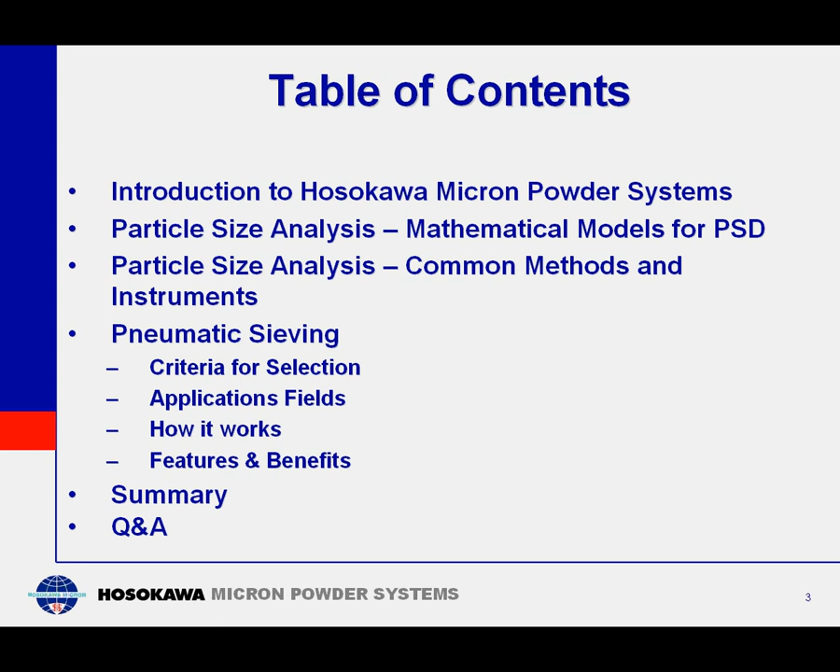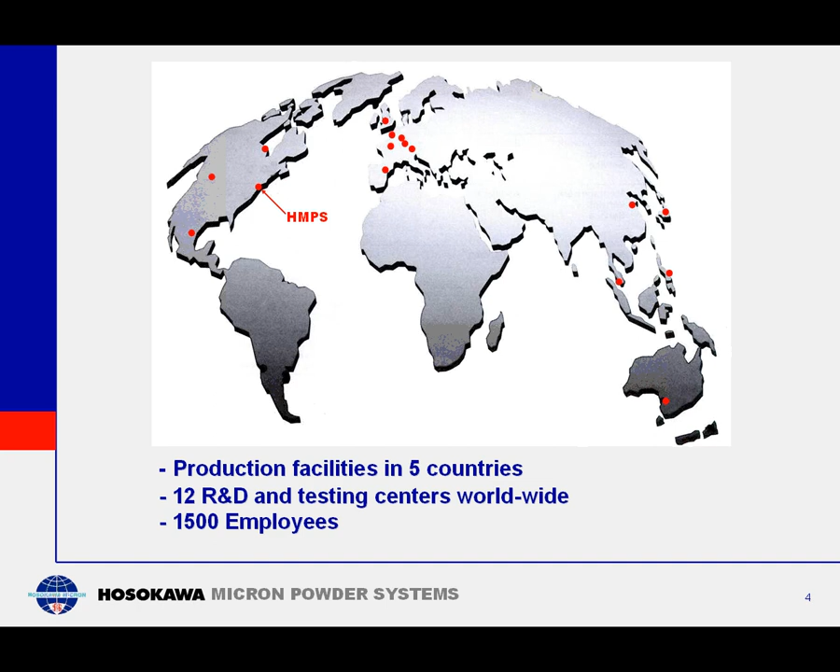Hosokawa Micron Powder Systems is a division of the Hosokawa Micron Group, headquartered in Osaka, Japan. We are the global leader in powder processing equipment manufacturing, employing over 1,500 employees worldwide, with production facilities in 5 countries and 12 research facilities and state-of-the-art technical centers. Hosokawa Micron Powder Systems is the North American division of the Hosokawa Micron Group, supplying products and services in the chemicals, minerals, food, and pharmaceutical markets.

Our brand names include Mikro, Alpine, Micron, Vrieco-Nauta, Majac, Stott, and Vitalair. Our division was founded in 1923 under the name Pulverizing Machinery. We are located in Summit, New Jersey, with approximately 50 employees, and have been part of the Hosokawa Micron Group for approximately 23 years.

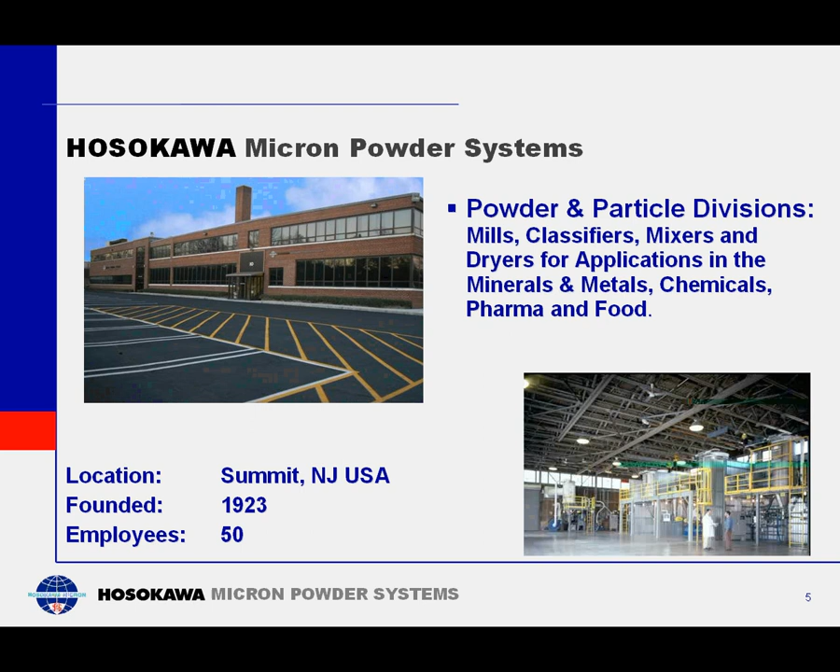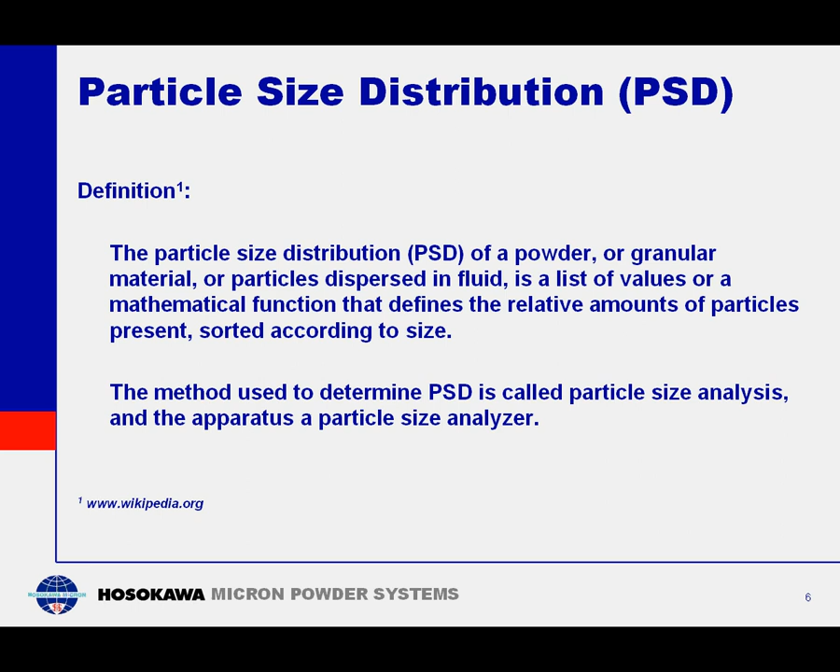Before we review the models and common methods for particle size analysis, it is essential that we first define the term particle size distribution. Particle size distribution of a powder, granular material, or particles dispersed in a fluid is a list of values or mathematical function that defines the relative amounts of particles present, sorted according to size. The method we use to determine particle size distribution is called particle size analysis.

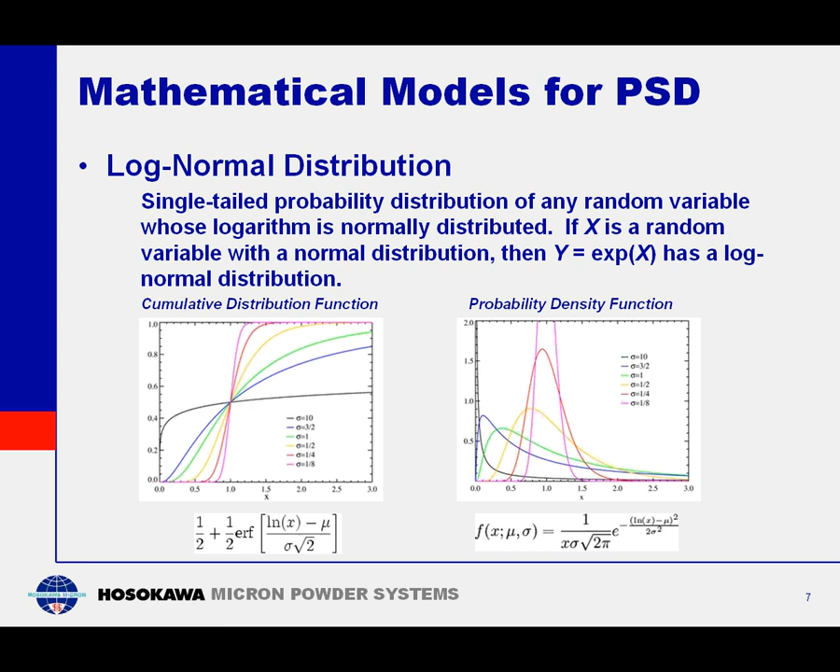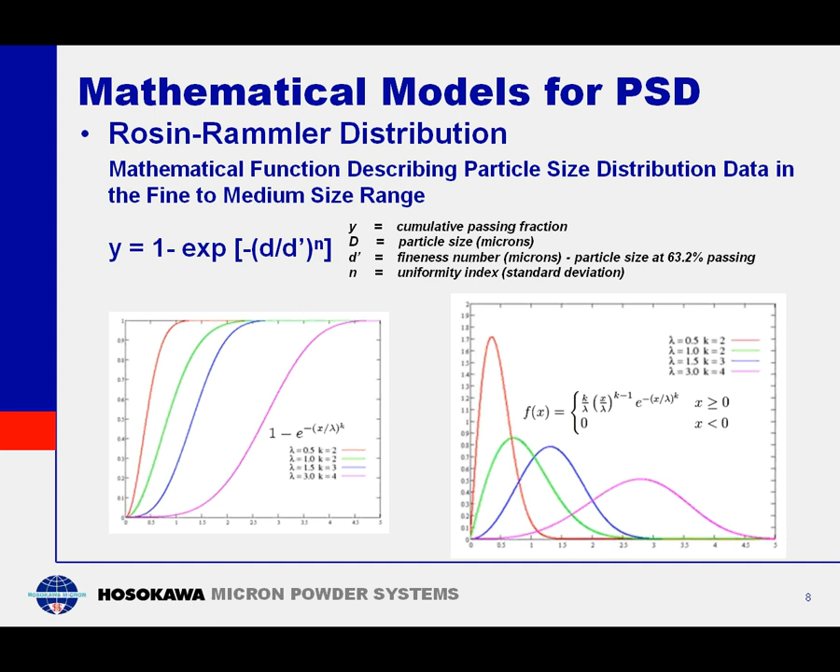Before we review the methods for particle size analysis, one must first ask: how do I select the right type of analyzer? Here are common criteria for selection. They include: what is the particle size range of the powder or of your sample? What are the characteristics of the powder—for example, is it soluble in water or alcohol? Is it cohesive? Is it friable? How poorly or well does it flow?

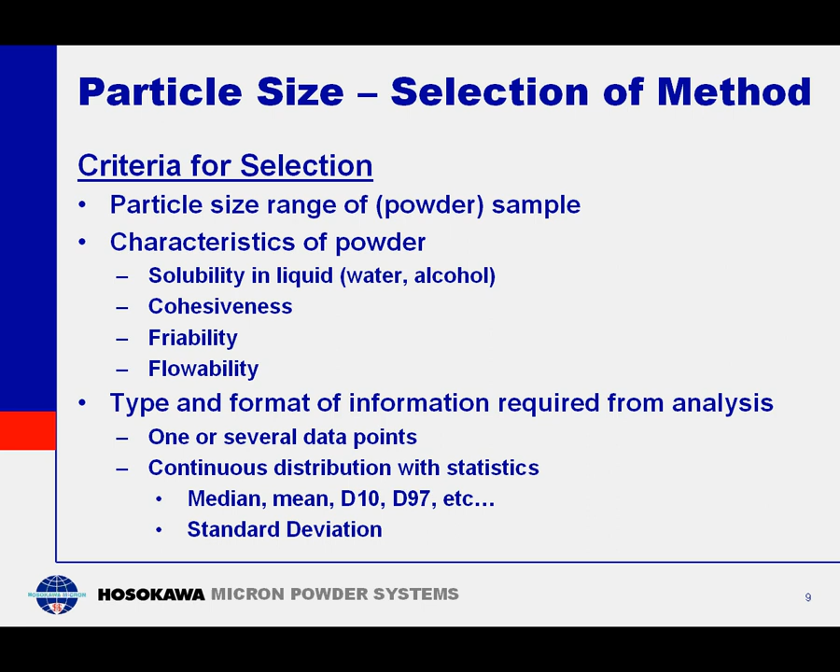Also, what are the types and formats of information required from you or from your customers for analysis? For example, do you need only one or several data points, or a continuous particle size distribution? Are key determinants such as median, mean, D10, or D97 important? And do you need to know information such as standard deviation?

While the primary focus of this presentation is aerodynamic sieving, we wish to first present a cursory review of the most common methods, including optical counting, sedimentation techniques, laser diffraction, electroresistance counting, acoustic spectroscopy, and sieve analysis.

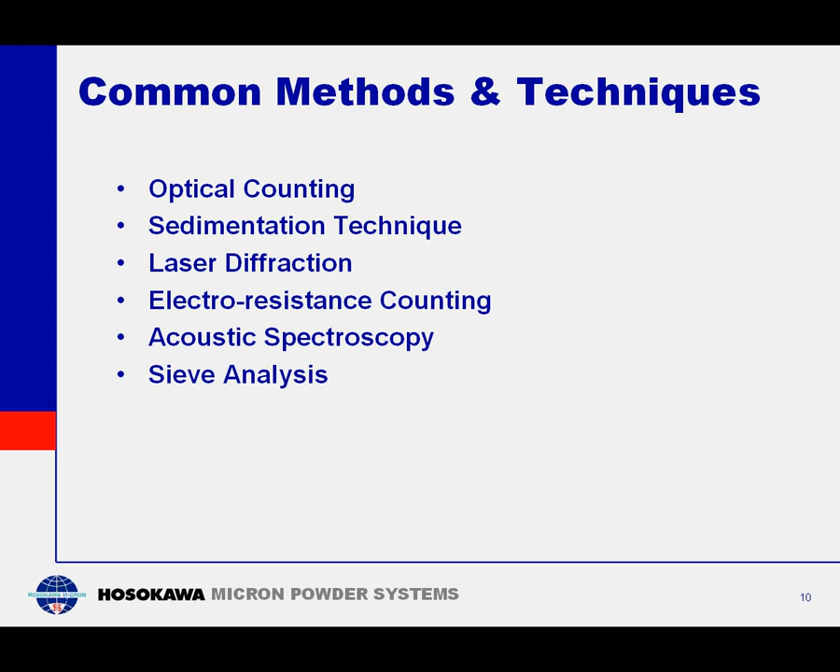Optical counting is simply measuring particle size via scanning electron microscope or other types of microscopes, as seen here.

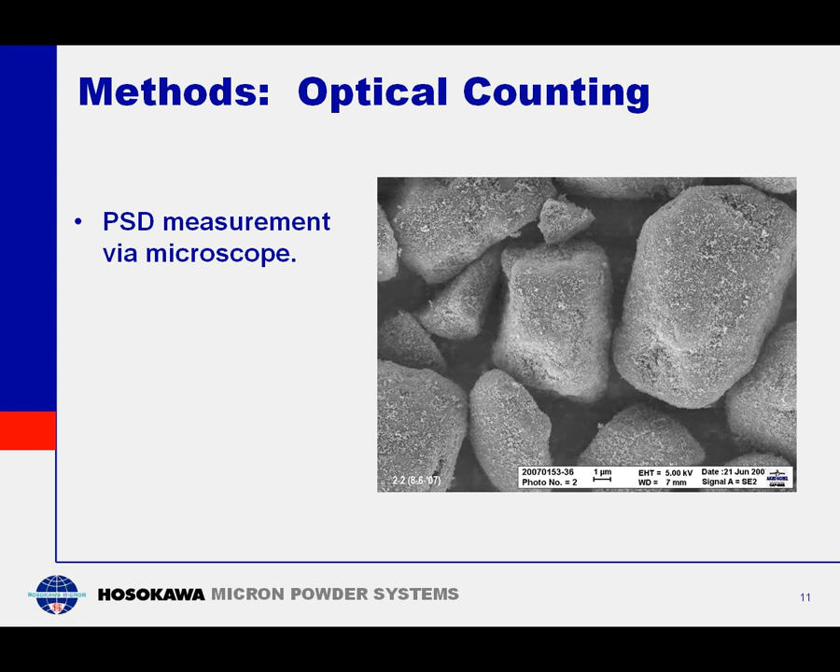For the sedimentation technique or sedimentation principle, you must have a fluid or liquid of known properties. The particles settle in this fluid, and you're measuring the gravity-induced settling velocity of the different particles. The rate that these particles fall or settle is defined by Stokes' law, as seen here. An example of sedimentation technique is the SediGraph, where we can measure particles from approximately 0.1 microns and upwards of 300 microns.

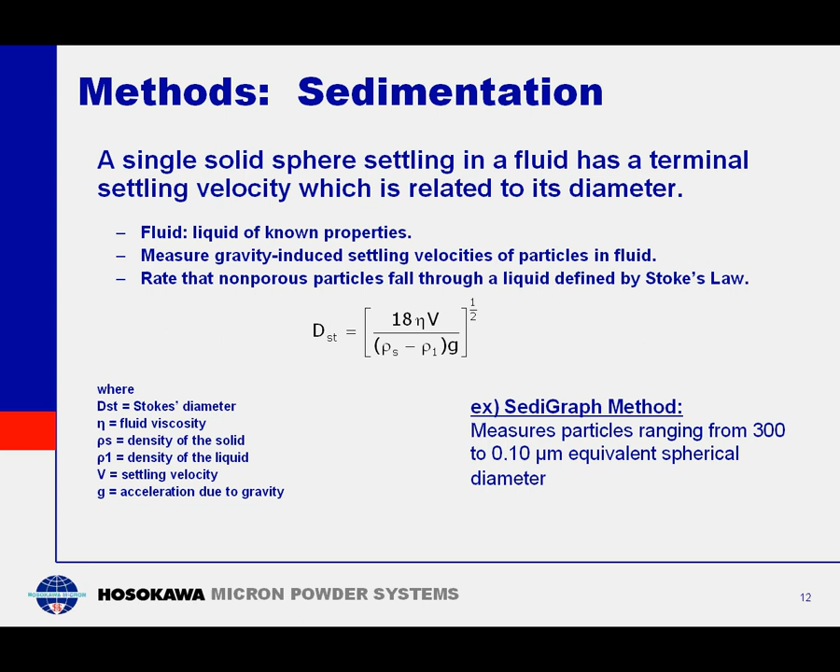The next method is electroresistance counting. In this case, a liquid carries a population of particles through an orifice. There are two electrodes and a voltage is applied across the aperture. The aperture is located in this tube that's immersed in this liquid here. As the liquid and particles pass through the orifice, there's a momentary change in impedance. The size or the volume a particle displaces is related to this impedance.

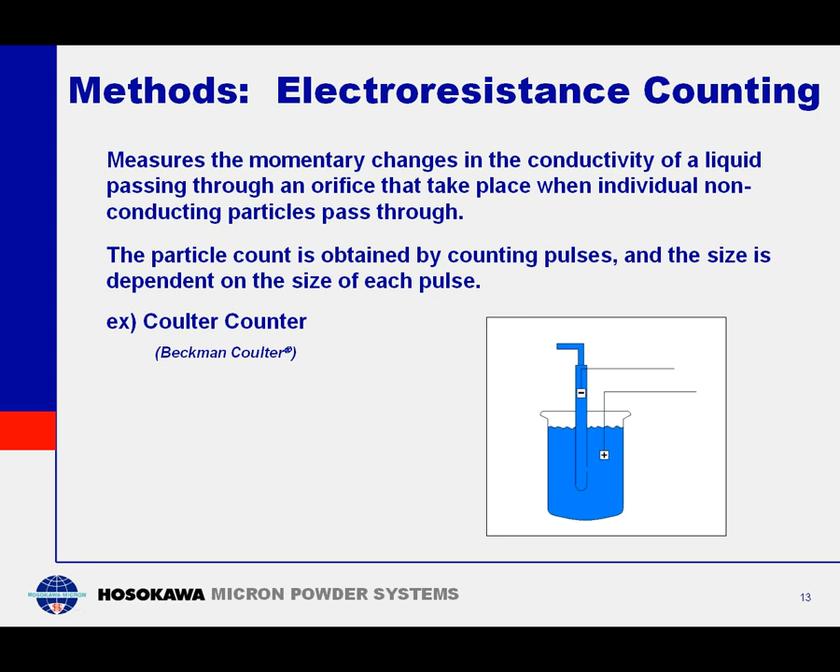Another method, not as common, is called acoustic spectroscopy. It simply employs ultrasound instead of light for collecting information on the particles that are dispersed in a particular fluid.

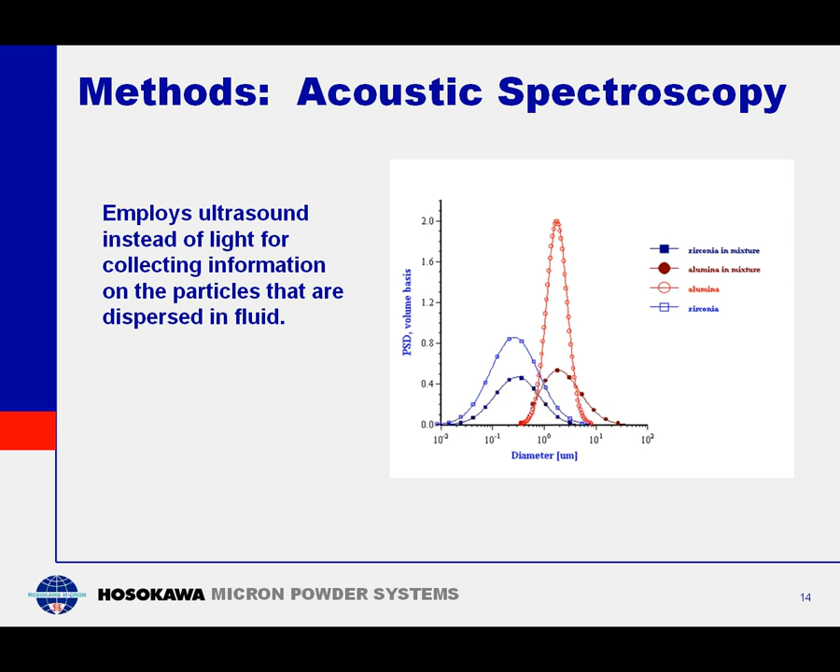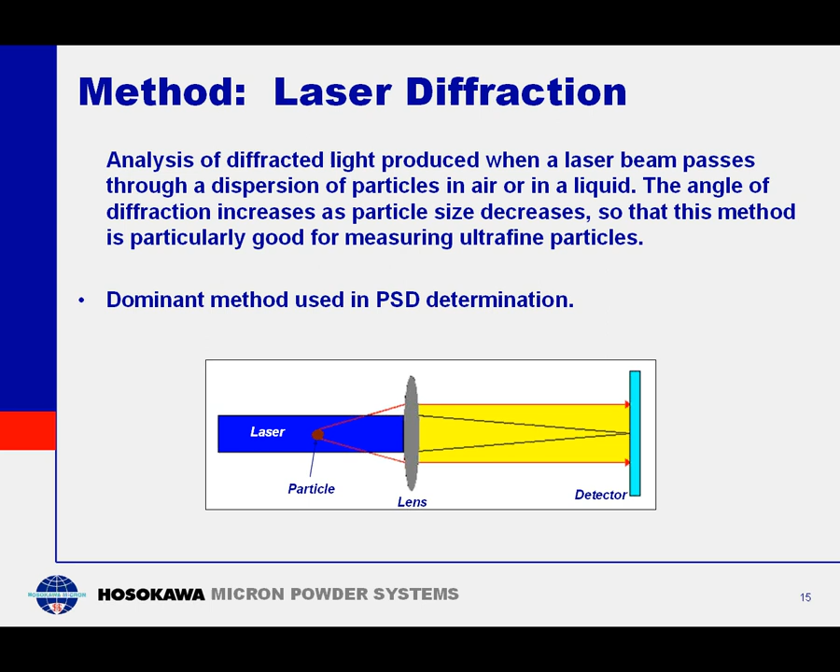The next, a very common method used, is laser diffraction. A laser beam, if you will, illuminates the passing particles in the scattering volume. These particles scatter light, generating very unique angular scattering patterns. These distinct patterns, or diffraction angles, are related to particle size, and thus a particle size distribution can be obtained for a given sample. Again, this is perhaps one of the most common methods used to date, and is applicable for particle size ranges from approximately 0.4 to 2,000 microns.

At this point, I would like to turn the presentation over to Mr. Timothy Calvo, Laboratory and Analytical Equipment Manager here at Hosokawa Micron Powder Systems. Tim is our in-house specialist responsible for our aerodynamic sieving product line. Tim is a veteran in the industry, working for Hosokawa over 20 years.

Thank you. As Mr. Brown indicated, the primary thrust of this presentation is on sieve analysis. Many of you may be aware, and possibly not, that there are many types and techniques of sieve analysis: the throw action, the horizontal, the sonic, the wet, and the pneumatic, which we're going to emphasize on today.

Throw action. Typically, this is the type of process where a stack of screens is mounted onto a mechanical apparatus, and the mechanical apparatus is either gyrated or hit with a hammer or an action causing the particles to bounce within the cavity between the screens. As the material bounces between the cavity within the screens, those particles fine enough will pass through from screen to screen to screen.

Horizontal or oscillating. Again, a mechanical function is taking place where the material is shifted within the cavity of the screens, here stacking screens. So the material then has to rely on the fact that it is displaced from one level to the next, allowing the finer material to pass through the screens, through the entire stack of screens, that is.

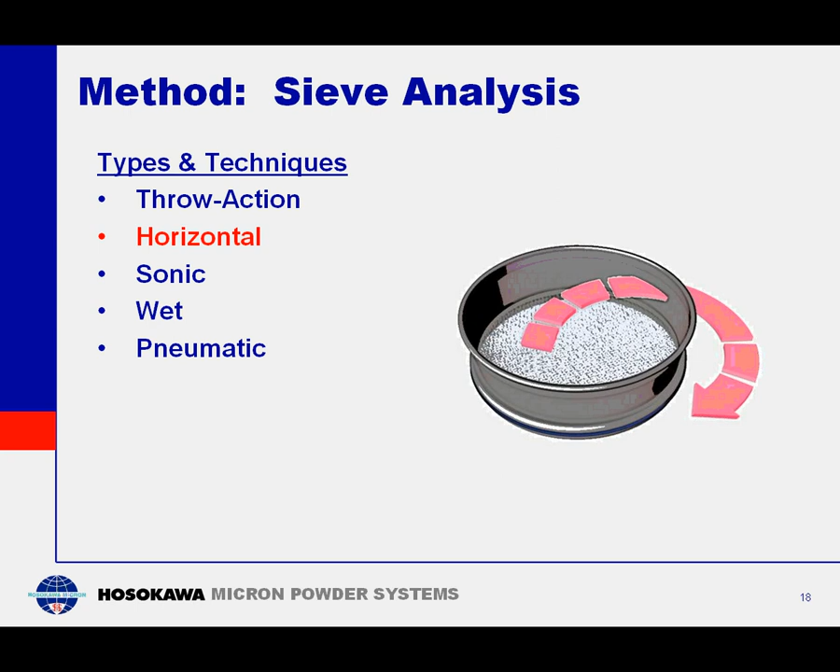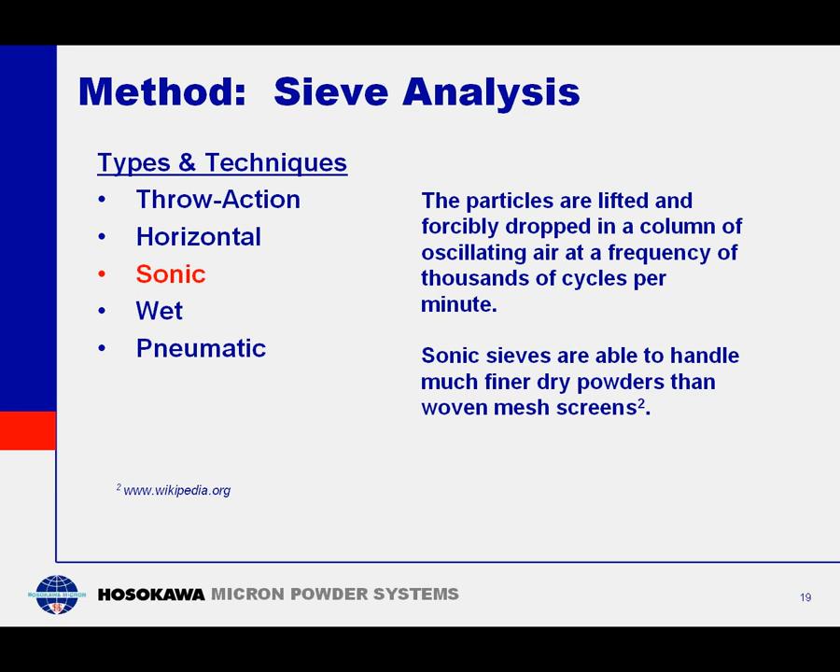Sonic. Sonic is typically used for a finer type screen, a finer type material, and is utilizing a sound level which generates a wave of air, and this is typically performed at a higher frequency. Again, you're relying on the fact that the screens are stacked and the material must travel through the entire stack of screens.

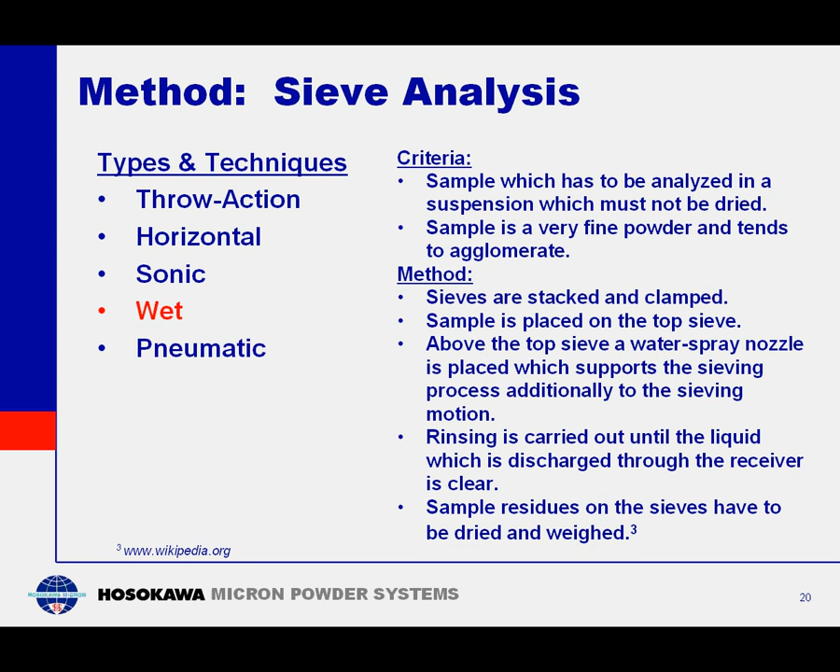Wet sieving. Wet sieving is typically used when the material or suspension cannot be dried. Again, very fine powders. However, those fine powders have a tendency to agglomerate. Sieves are stacked. The sample is placed on the top sieve, and water is sprayed by means of a nozzle across the top sieve, which then transports the material from sieve to sieve to sieve. Ultimately, the rinsing water is emitted clear from the bottom sieve, at which time the sieving process is concluded, and then the residual on the sieves must be dried and then weighed to determine the particle size distribution.

Pneumatic aerodynamic sieving, our thrust today.

Aerodynamic sieving utilizes the pneumatic sieving principle. This principle takes negative air pressure and draws the particles through a screen, creating a flow upward by means of a wand that rotates directly beneath the screen, as you see here where I'm pointing.

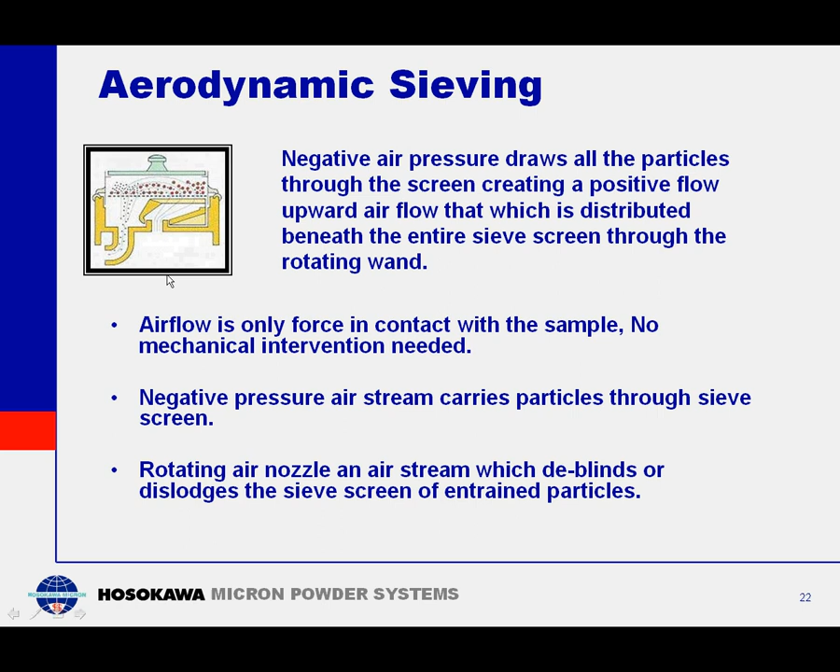The gas travels through the wand, distributes the material between the sieve cover and the cloth, allowing all the particles to become fluidized so that if there's blinding that may occur, or larger particles block the path of a smaller particle, the particles are then moved around, allowing all the particles to come in contact with the screen, and thus the finer particles are carried in the gas stream onto a collection device such as a cyclone or a vacuum.

Here on this caption you can actually see a sample that is being distributed across the top of the screen, and as you see, the volume of material is gradually diminishing while the screening process is taking place.

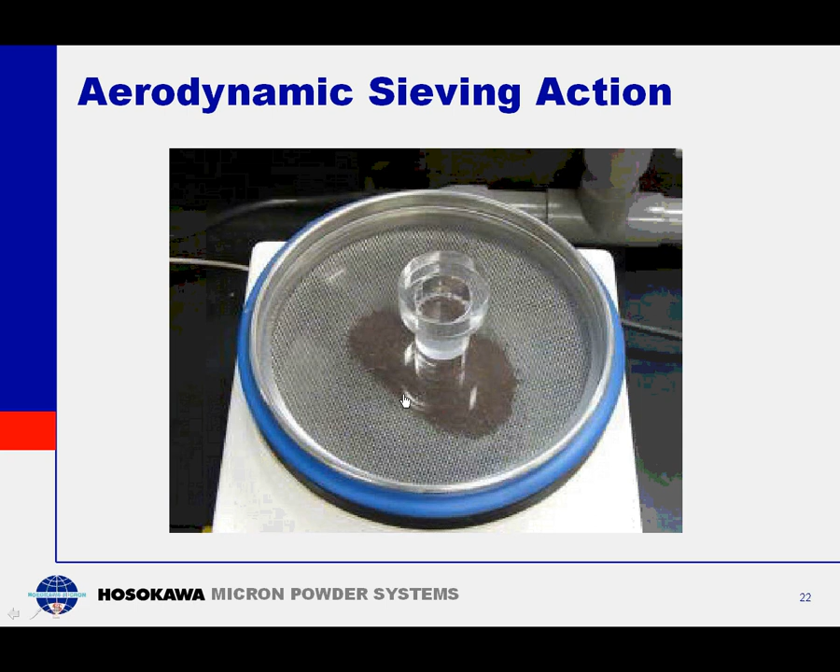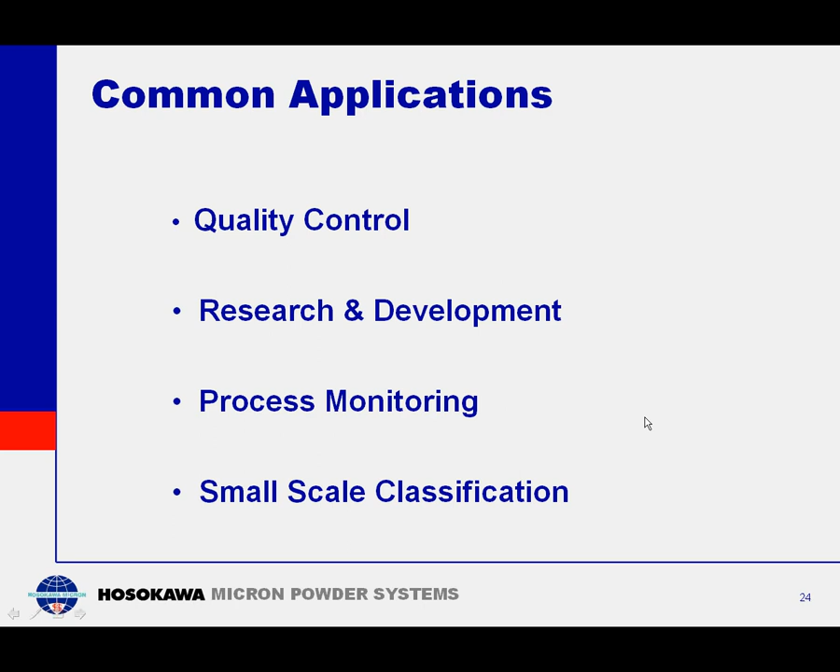Common applications: quality control, an important factor, research and development, process monitoring, and as mentioned previously, small-scale classification, where clients want to have a separation of material for other factors or determination.

Analysis immunities: particle shape, variable density, contamination, vibration, dust, and temperature.

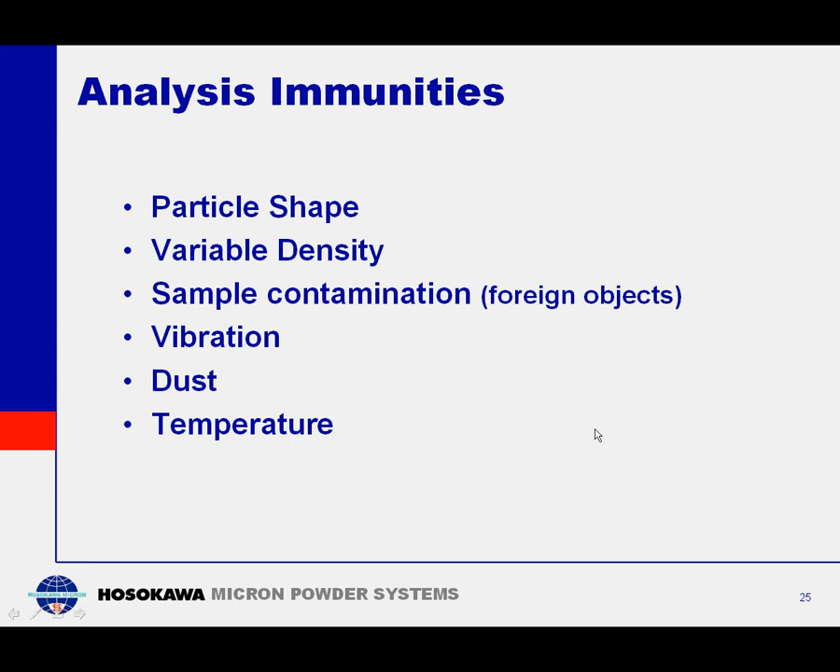The operational parameters that ensure repeatability - these are 4 key parameters. Sample size by weight, typically speaking, plus or minus 1 gram is the typical range.

Sieving time, anywhere between 1 to 3 minutes, depending upon the initial starting size of the material and how fine you're analyzing. Vacuum pressure nominally is between 8 to 16 inches.

However, if the material is somewhat friable, then the vacuum pressure can be reduced down even lower. The most important, and I cannot emphasize enough, is the cleanliness or the integrity of the sieve screen.

This portion, or apparatus, of the sieving process is the most important, because without the integrity of the sieve screen being in place, the results that you will get from the analysis are questionable.

So if the mesh on the sieve is wavy, is marked, is damaged whatsoever, at that point in time, the sieve then needs to be disposed of and replaced.

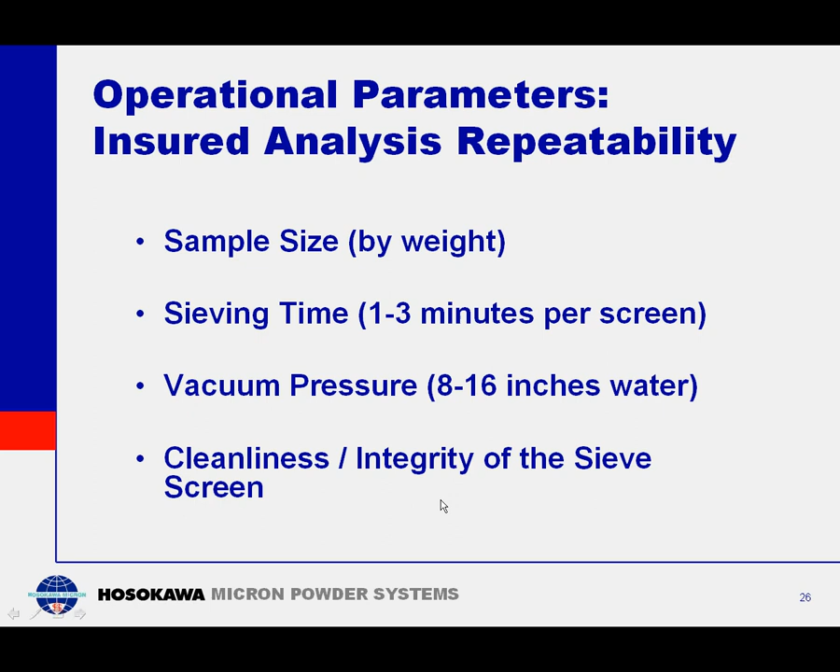Air sieving benefits: as I mentioned before, highly reproducible results, provided the operational parameters are held within a reasonable tolerance.

Some powders have a high saturation of ultrafines and can stick to those screens from level to level on shakers or oscillating screens, blocking the passage of the finer material. With the airjet, this does not take place, simply because of the pneumatic sieving, the air that distributes the material across the top of the screen.

Energy and time savings: 1 to 3 minutes per screen, whereas with the oscillating or shaking method, approximately 10 to 20 minutes.

Accurate results. The reason why the results are so accurate is because during the process, the fines are removed first.

And as we all know, the finer the particle, the greater the surface area, the higher the potential of those fines becoming attached or agglomerated to larger particles, thus skewing the results.

The rotating nozzle and the air that comes out of the nozzle as it's rotating dislodges or deblinds any of those larger particles that may have become blocked or blinded the screen.

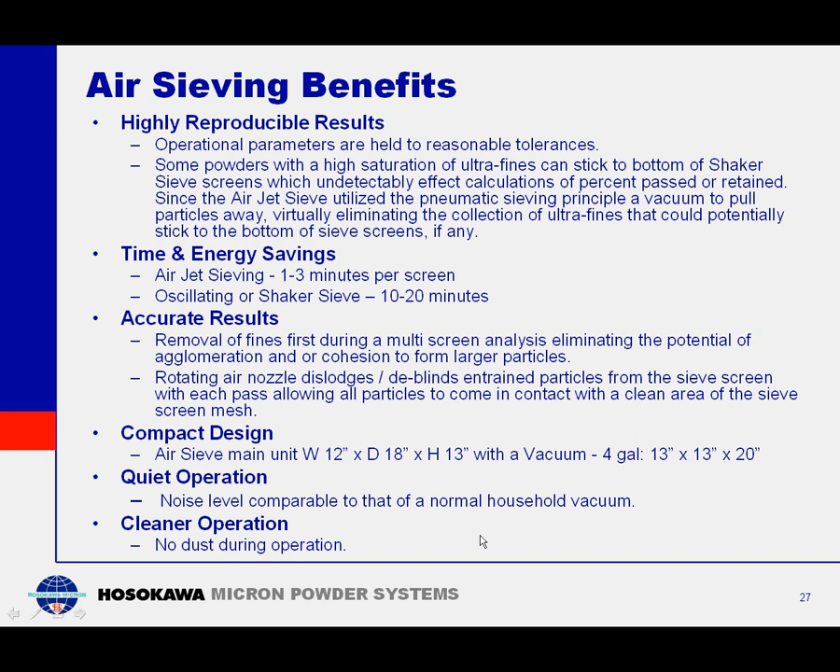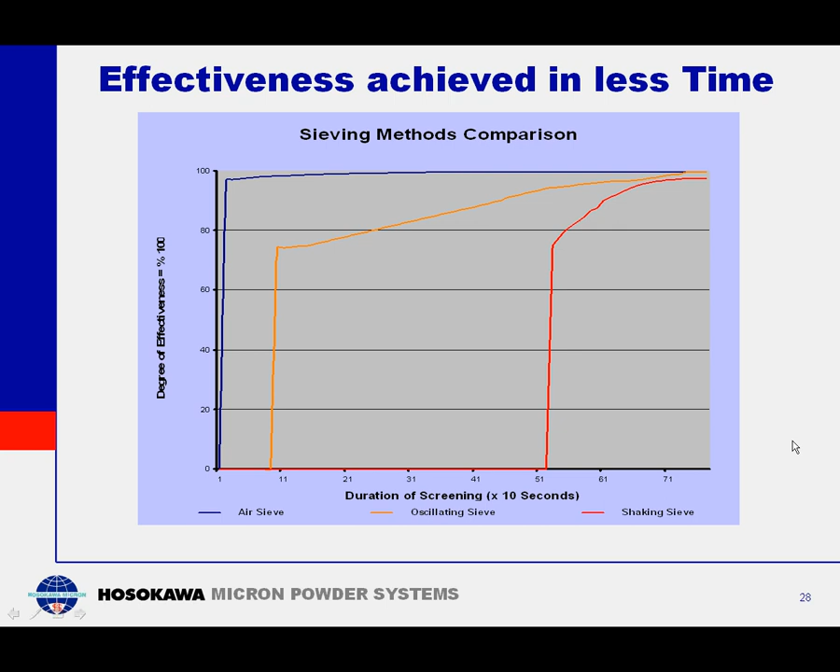The air sieve device, the basic model, consists of basically the main unit or the main instrument and the vacuum. Operation, however, relies on the operator.

The operator must weigh and record the sample weights manually, and upon conclusion of the sieving process, the operator then must calculate the percent retained or percent passing.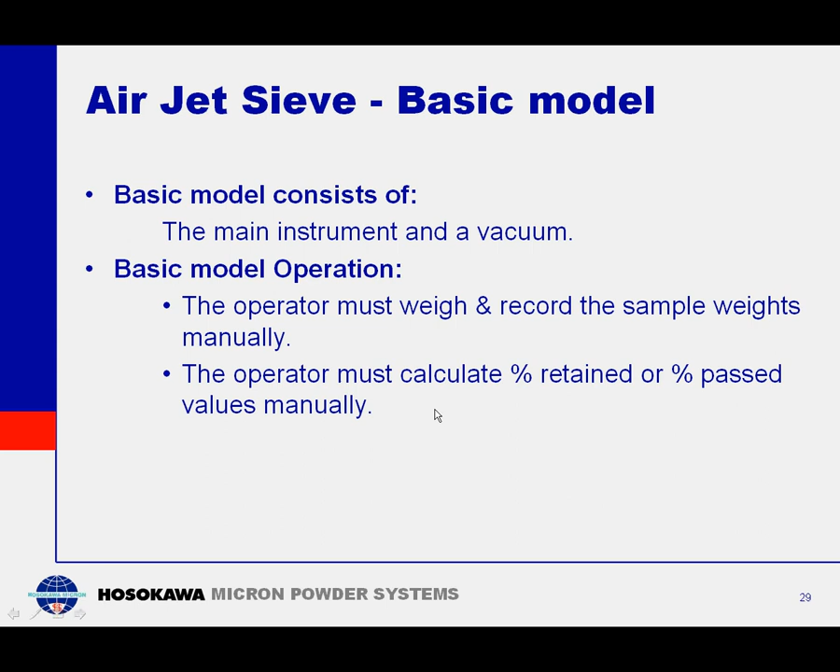Whereas the advanced model consists of, once again, the main instrument, the vacuum, the balance, the operational software, along with the required interconnection cables that allow for communication to take place between the main instrument, the balance, and the computer which stores the software.

The operation is quite simple. The operator enters the sample information at the beginning of the software process and then simply follows the instructions displayed by the software on the computer screen.

The sample weights are recorded directly from the balance. The analysis results are then automatically displayed on the computer screen and can either be electronically saved or printed using the default printer attached to the computer. Upon completion of the analysis, the operator can vary the results by pressing a toggle switch to obtain either the percent passing or the percent retained.

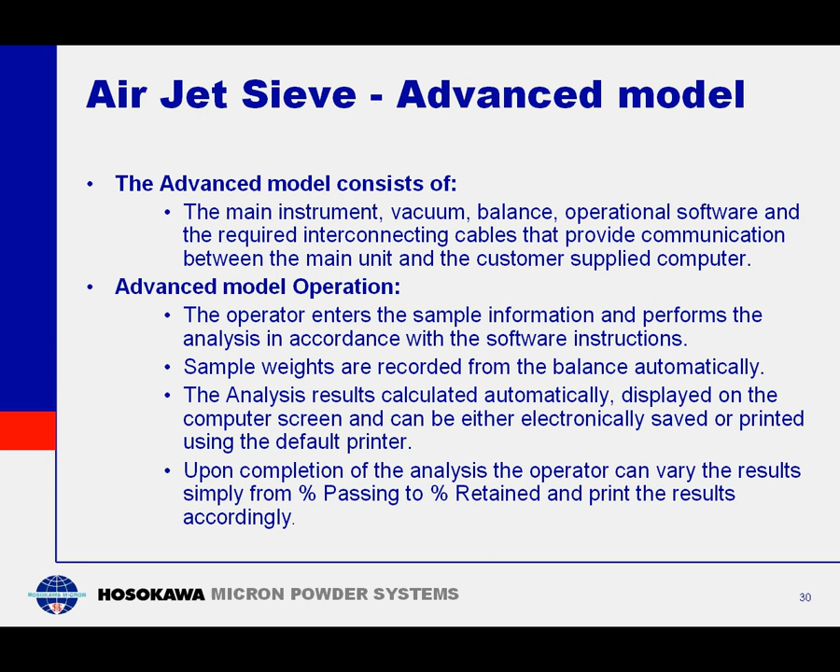Additional benefits using the advanced model: as mentioned earlier, the user-friendly software guides the operator through the analysis, with electronic recording of the sample weights automatically, and it calculates the percentage passing or retained rather than manually having to calculate them.

It creates linear, logarithmic, or Rosin-Rammler format graphs. And while in the Rosin-Rammler format, you also have the ability to obtain 3 additional points, which are variable anywhere between 0.1 to 99.99%.

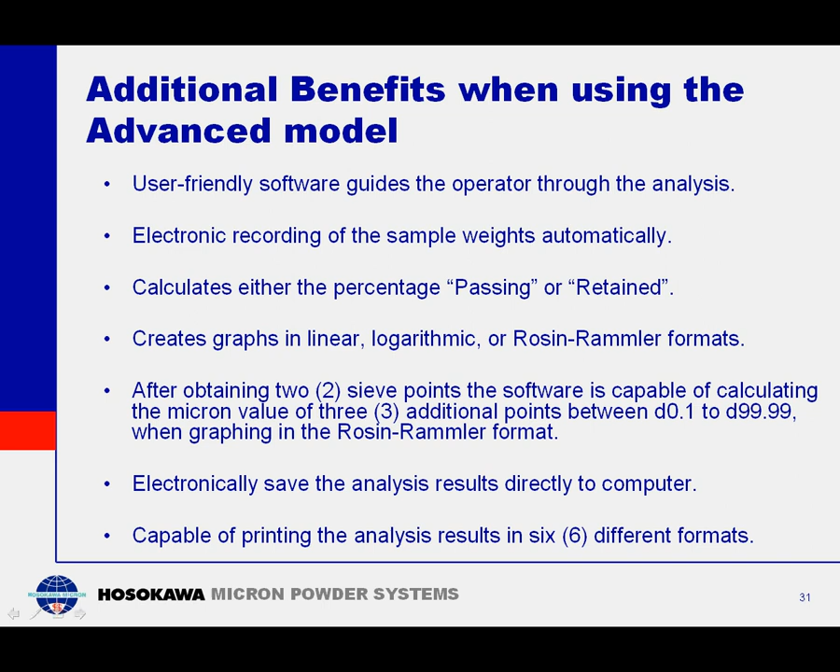As mentioned earlier, you can now save the data for future reference or printing. You can now print in 6 different formats: 3 in percent passing, 3 in percent retained.

This caption gives an indication of the arrangement or style of equipment used in the advanced model setup: your vacuum, your air sieve, your scale. Your air sieve and scale communicate directly to your PC, which is controlled by your keyboard and printer.

For the basic model, it's strictly the vacuum and the air sieve. Notice the environment, as far as Windows, is either Microsoft Windows 2000 or XP.

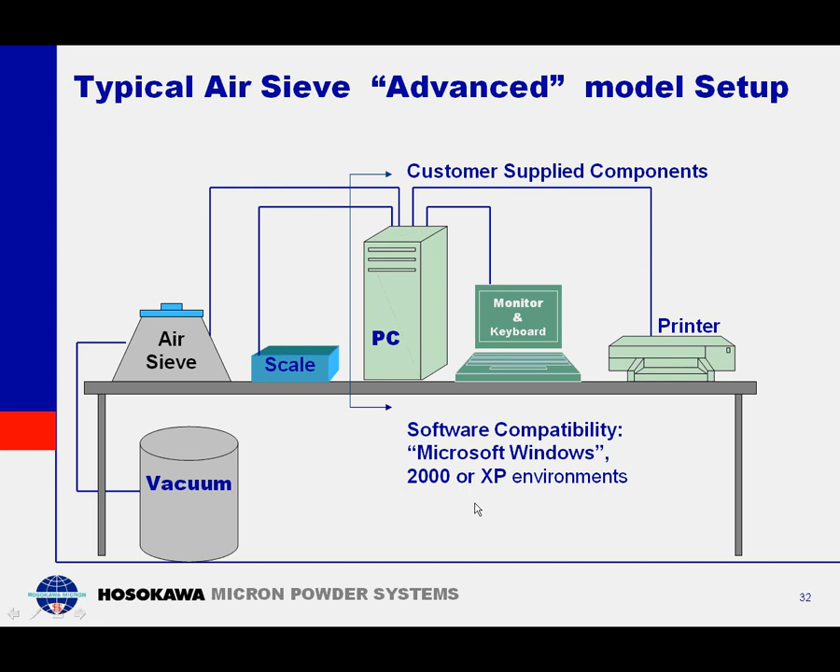This caption shows what one would see if utilizing the software: the Micron size, the sieving time, the weight of the empty sieve screen, the weight of the screen before the sieving process takes place with the sample, then the total weight afterward.

As mentioned before about the parameters, you'll also have an indication here of what your vacuum pressure is. Then in the conclusion, you have your percent cumulative or your percent differential, which can be changed simply by pressing this toggle switch from pass to retain.

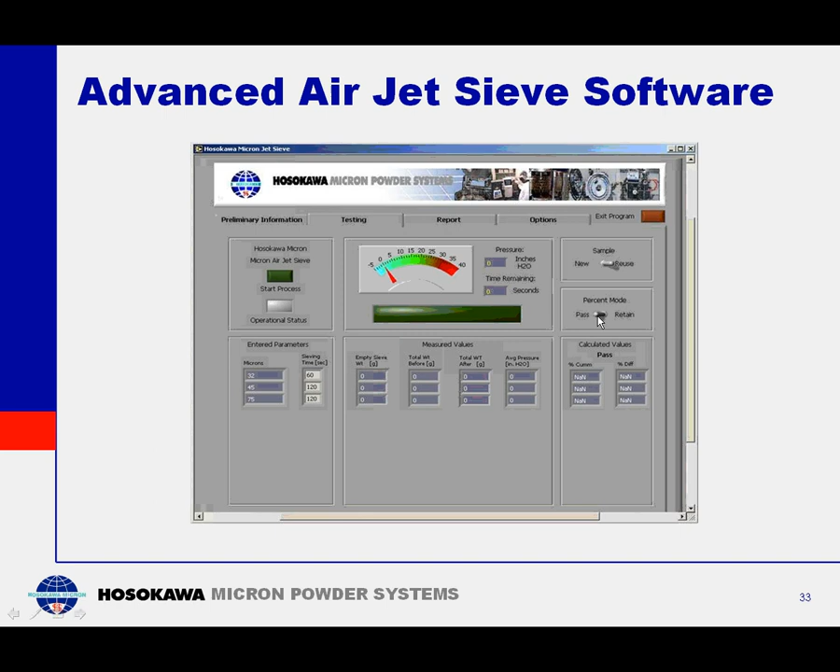Earlier in the program, I mentioned that the sieve screens are the most critical part of the entire analysis process. The air sieve utilizes a wire cloth sieve screen in micron sizes from 20 to 4,750, otherwise known as 635 mesh to 4 mesh.

However, in the 63 millimeter diameter size displayed here, you can also obtain screens down to 5 micron. These are typically nickel etched screens, and of late we've been able to obtain 10 and 15 micron nickel etched screens in the full size.

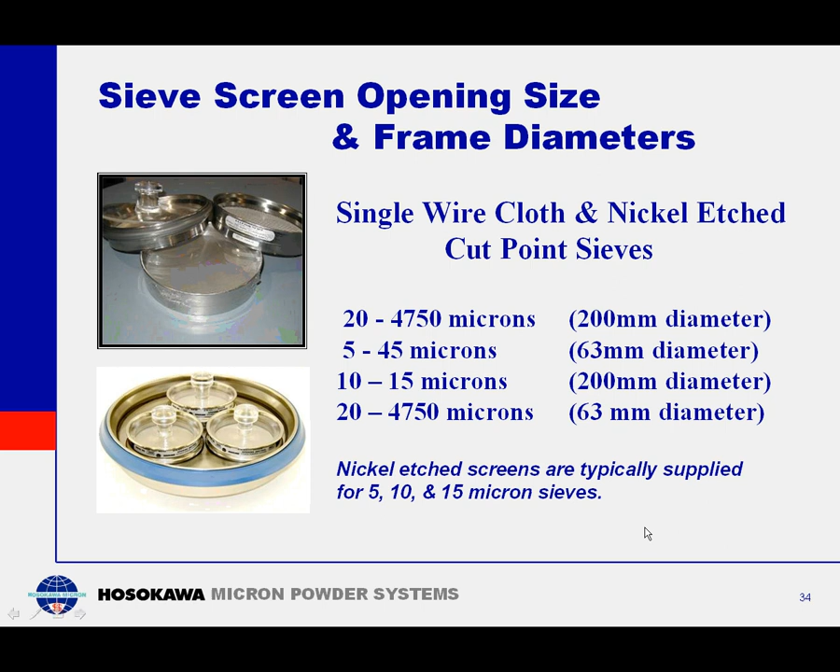The screen specifications: each screen is supplied serial numbered and accompanied with a certificate of conformance. This is vital when it comes time for assurance and complete traceability. Each screen is constructed with a 304 stainless steel frame and utilizes 316 stainless steel cloth.

The screens can be autoclaved to eliminate any contamination of bacteria from sample to sample. Each test screen is supplied with a larger standard 200 millimeter frame with a new gasket.

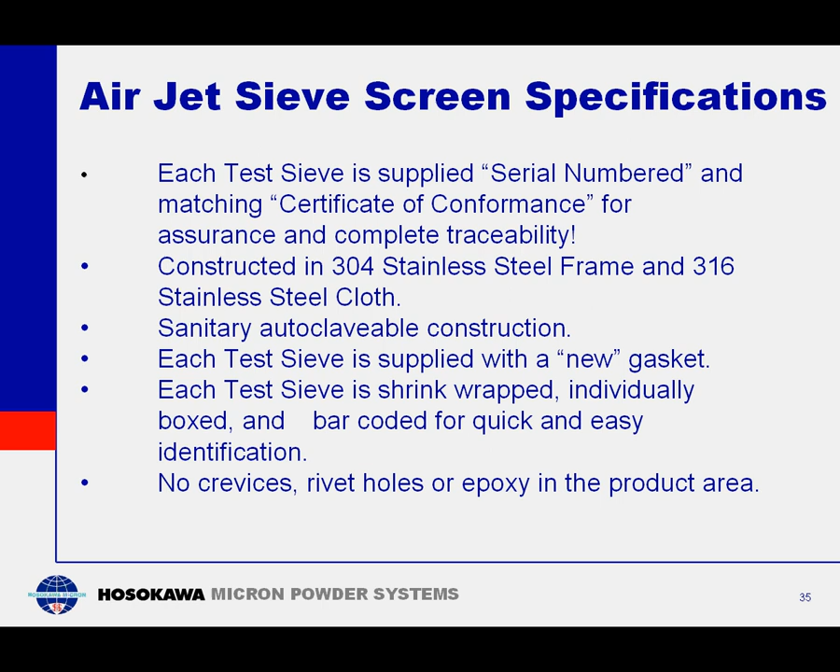Each screen is shrink wrapped and individually boxed, barcoded for quick and easy identification, but also as insurance that the screen has not been previously used. And lastly, there are no crevices, rivet holes, or epoxy in the product area that would enable material to electrostatically attach, causing skewed results.

Lastly, the system can be mated with a downstream cyclone for those cases when clients wish to have additional separation or classification of the sample. This allows for further evaluation of the collected sample, and it can also act as a classifier.